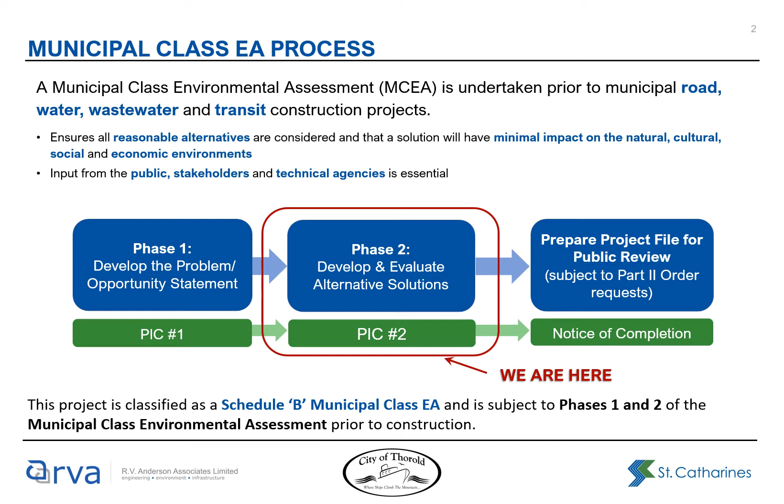Problem Opportunity Statement and Study Area. As shown on the attached plan, the study area consists of St. David's Road from Burleigh Hill Drive, Collier Road to Townline Road, and Townline Road from St. David's Street West to East Limit. This environmental assessment study was initiated to review opportunities to address several issues within the study area.

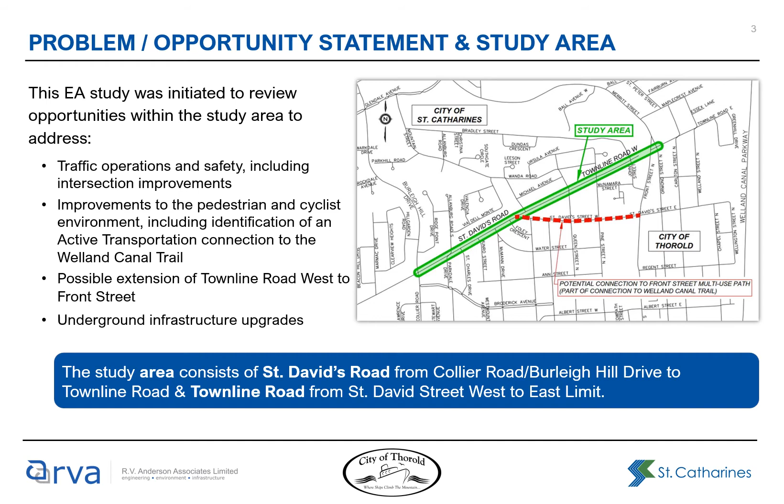The problem opportunity statement includes the need to address traffic operations and safety, including intersection improvements, improvements to the pedestrian and cyclist environment, including identification of an active transportation connection to the Welland Canal Trail, possible extension of Townline Road West to Front Street, and underground infrastructure upgrades.

Evaluation of alternative solutions. In Phase 2 of the Class EA process, alternative solutions to address the problem opportunity statement are developed. Each of the identified alternative solutions presented at the first PIC were comparatively evaluated based on criteria that represent the broad definition of the environment as described in the Environmental Assessment Act.

Evaluations are based on their impacts to technical environment: how the alternative addresses the technical requirements including safety, road condition, drainage, and utility needs; transportation performance: how the alternative addresses the transportation requirements including vehicular, pedestrian, and cyclist needs; socioeconomic environment: how the alternative impacts the local community, including compatibility with land use, impacts on local businesses and property requirements;

natural environment: how the alternative impacts the vegetation, water quality, fisheries, and wildlife habitat, as well as how the alternative addresses climate change; cultural heritage and archaeological environment: how the alternative will impact the cultural heritage and archaeological resources or First Nations communities; and costs: what are the capital, construction, maintenance, property, and other costs associated with the alternative?

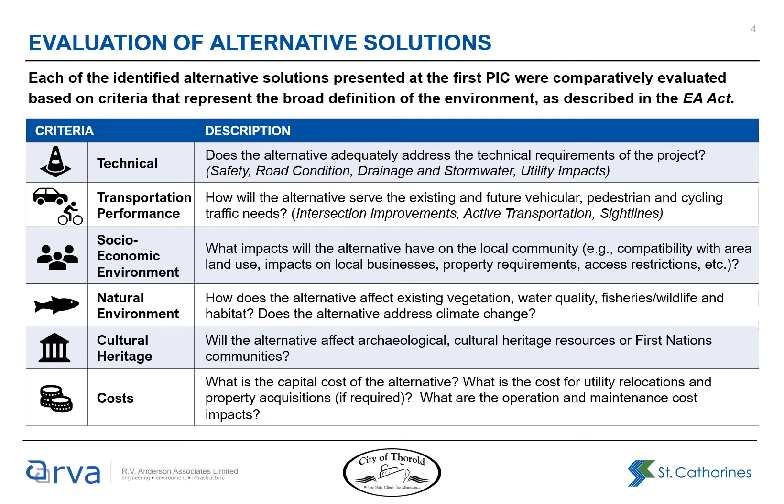Incorporating your comments. Alternative solutions were evaluated in consideration of all comments provided at Public Information Center PIC number 1 and via the online survey. Comments and questions provided at the first PIC included a strong preference for connecting Townline Road to Front Street with some concern regarding increased traffic on Townline Road, support for improvements to pedestrian and cycling amenities, including connections to Welland Canal Trail and Brock University, wide support for roadway reconstruction to address deteriorating pavement,

safety concerns with the current St. David's Road Townline Road intersection, including low visibility, pedestrian safety, and speeding vehicles. Roadway drainage improvements are needed with strong support for storm sewer upgrades. Sidewalks and cyclist pedestrian accommodation are desired on both sides of the road, provided there is no loss of property.

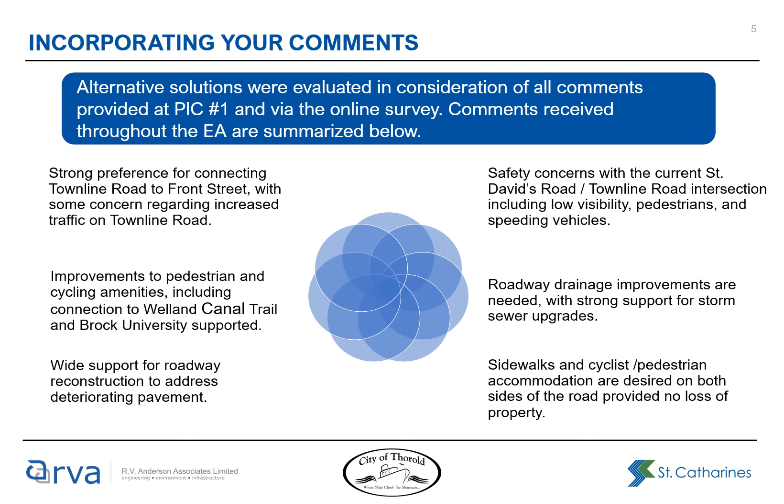Evaluation of alternative solutions, St. David's Townline Road intersection. Considered alternatives included: Alternative 1, do nothing. Alternative 2, realign St. David's Street West to create a standard four-way intersection with St. David's Road, Townline Road, and Leeson Street. Alternative 3, realign St. David's Street West to form a traditional T intersection with St. David's Road and Townline Road.

Alternative 4, realign Townline Road to create a T intersection with St. David's Road and St. David's Street West. And Alternative 5, realign Townline Road and St. David's Street West to create a roundabout configuration. Through the evaluation presented, Alternative 2, realign St. David's Street West to create a standard four-way intersection, is the recommended solution to be carried forward.

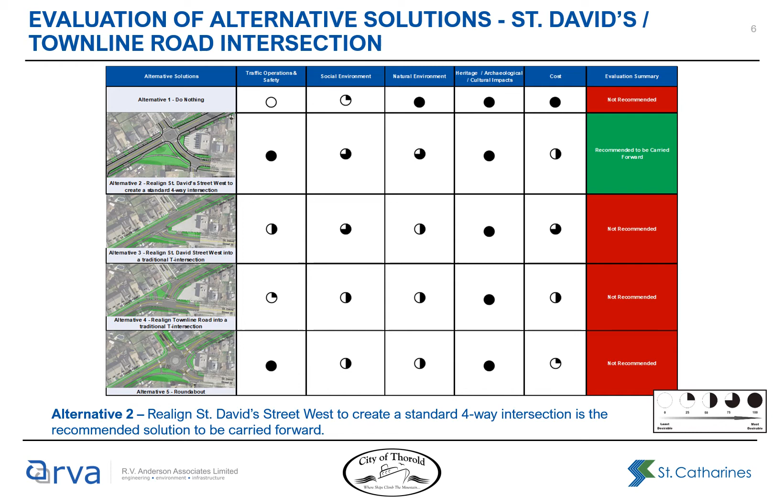Recommendation: St. David's Road Townline Road intersection. The recommended solution, Alternative 2, realign St. David's Street West to create a standard four-way intersection, will include the following key components: realignment of St. David's Street West through Commercial Plaza to create a standard four-way intersection, removal of the existing stop sign for westbound vehicles, creating a free flow of traffic between Townline Road and St. David's Road. This alternative requires property from Avondale Plaza and driveway access modifications to 65 Whyte Avenue.

The figure below provides a conceptual rendering of the recommended intersection improvements. The key benefits of implementing this solution are: eliminating the shortcutting through the plaza between Leeson Street and Whyte Avenue, improving the safety of the intersection for vehicles, pedestrians, and cyclists, minimizing impacts to plaza parking, and enhancing public space by providing a parkette at the southwest corner of the intersection.

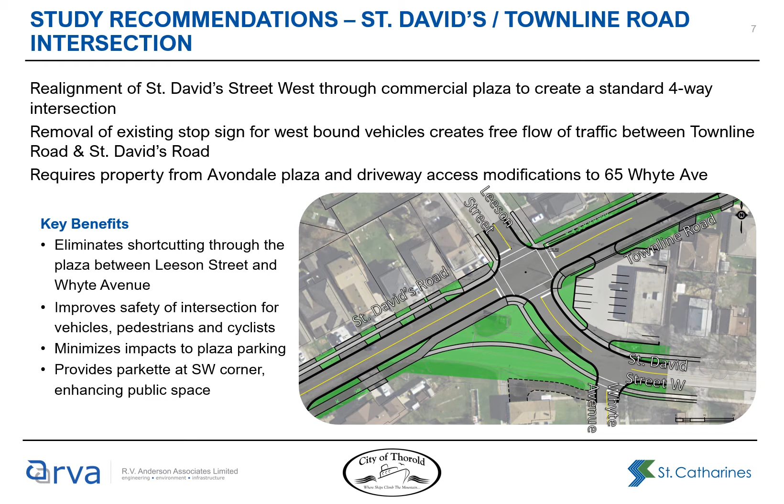Evaluation of alternative solutions, Townline Road extension. Considered alternatives included: Alternative 1, do nothing. Alternative 2, enhance trail connection only. And Alternative 3, extend Townline Road to Front Street. Through the evaluation of alternative solutions presented, Alternative 3, connect Townline Road to Front Street, Ormond Street North, is the recommended solution to be carried forward.

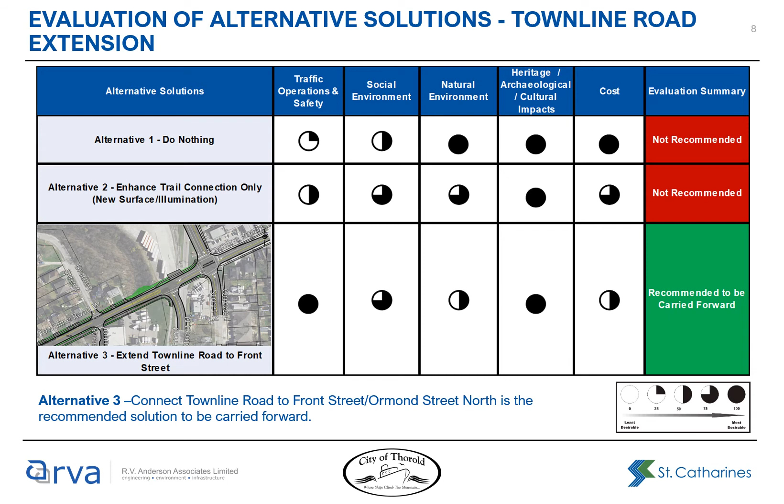Recommendations: Townline Road extension. The recommended solution, Alternative 3, connect Townline Road to Front Street, Ormond Street North, will include the following key components: extension of Townline Road East to connect with Front Street with a new multi-use path connection to Front Street, realignment and termination of Front Street at Townline Road, eliminating current one-way section of Front Street north of Townline Road, and relocation of the anchor gateway feature to southwest corner of the new signalized intersection, improving sightlines and aesthetics at the gateway to downtown Thorold.

The figure below provides a conceptual rendering of the recommended improvements. The key benefits of implementing this solution are: reduce truck traffic on Townline Road by providing an alternate route for commercial trucks, and improvements to emergency access and response times, network connectivity for all road users, intersection safety and operations through improved sightlines, geometry, signalization of intersection, and safety for pedestrians and cyclists through the introduction of sidewalk, multi-use path, and pedestrian crossings.

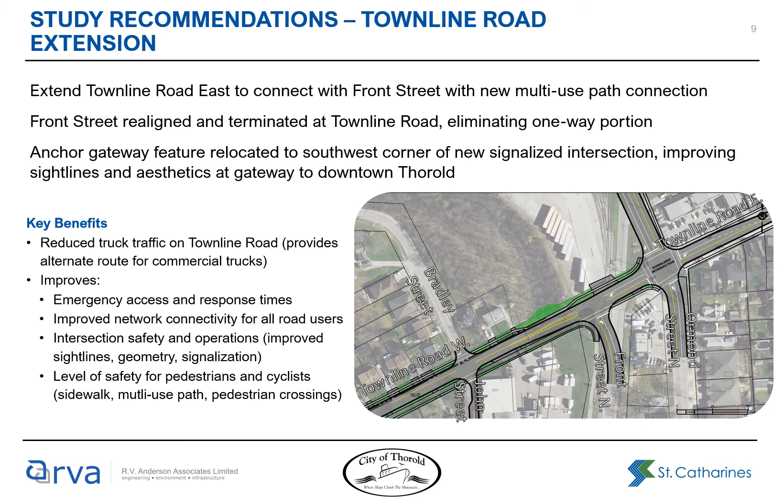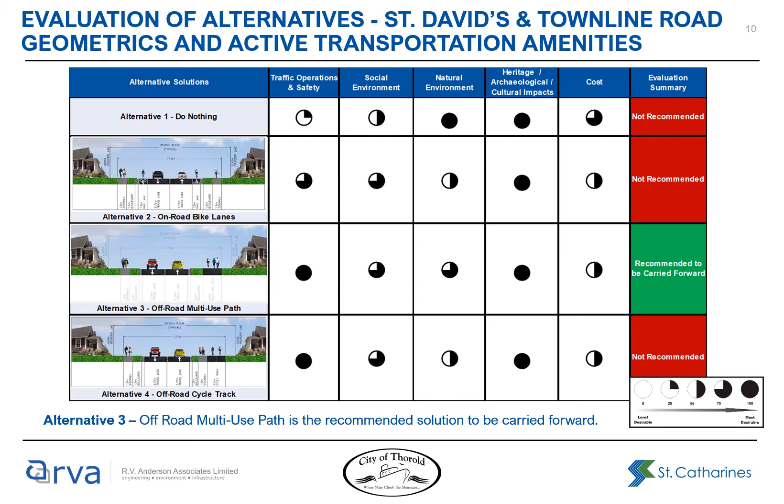Recommendations: St. David's and Townline Road geometrics and active transportation amenities. The recommended solution, Alternative 3, off-road multi-use path, includes the following key components. Separated 3-meter multi-use path along the south side with connections to future multi-use path west of Burleigh Hill Drive, Niagara Region. 1.5-meter sidewalk on north side of road. On-road parking spaces provided along south side of Townline Road. Roadside ditches to be replaced with urban curb and gutter, and minor encroachment towards properties at East End with no property impacts. The figures below provide a conceptual rendering of the recommended cross-sections for each road.

The key benefits of implementing this solution are respecting the current property line with no property required, separation between cyclists, pedestrians, and vehicles, connects with existing and proposed multi-use paths adjacent to the study area, and improved drainage via curb and gutter.

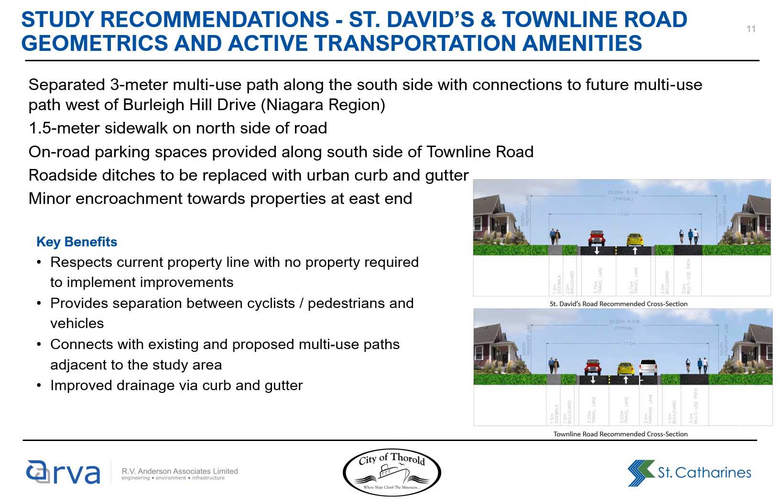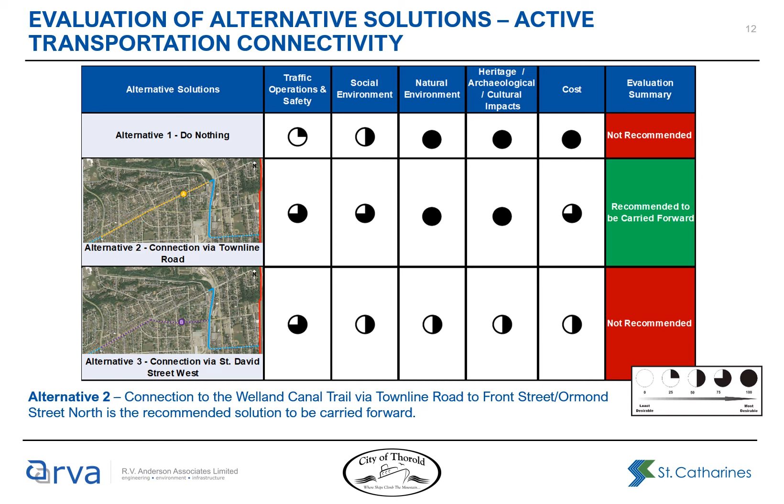Evaluation of alternative solutions, active transportation connectivity. Considered alternatives included Alternative 1, do nothing, Alternative 2, connection to the Welland Canal Trail via Townline Road to Front Street, Ormond Street North, and Alternative 3, connection to the Welland Canal Trail via St. David Street West to Front Street. Through the evaluation of the alternative solutions presented, Alternative 2, connection to the Welland Canal Trail via Townline Road to Front Street, Ormond Street North, is the recommended solution to be carried forward.

Recommendations, active transportation connectivity. The recommended solution, Alternative 2, connection to the Welland Canal Trail via Townline Road to Front Street, Ormond Street North, will include the following key components. The installation of a multi-use path along the south side of Townline Road to Front Street, Ormond Street North, connecting to the existing multi-use path on Front Street. This new connection will provide a continuous route into downtown Thorold where pedestrians and cyclists can access the Welland Canal Parkway Trail via future multi-use trail on Regent Street.

The figure below provides a conceptual rendering of the recommended cross-sections for each road. The key benefits of implementing this solution are no additional impacts to property or from construction along St. David Street West, reduced construction costs, provides connectivity to Merritt Trail, and provides continuous connectivity from Welland Canal to Brock University and downtown Thorold.

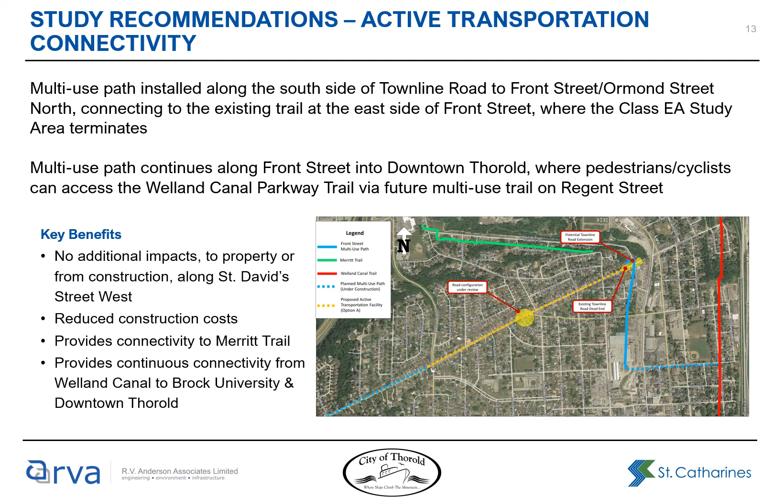Study recommendations, drainage and municipal service upgrades. To improve drainage and stormwater management and upgrade municipal services, suggestions include upgrade or replacement of the existing storm sewer and installation of new storm sewer at the east end of Townline Road. No existing storm sewer in this location. New storm sewer is recommended to outlet within the existing culvert of the old Welland Canal, minimizing impacts to the watercourse and vegetation. Roadside ditches to be replaced with curb, gutter, and catch basins draining to the storm sewer, and minor water main replacement in some areas.

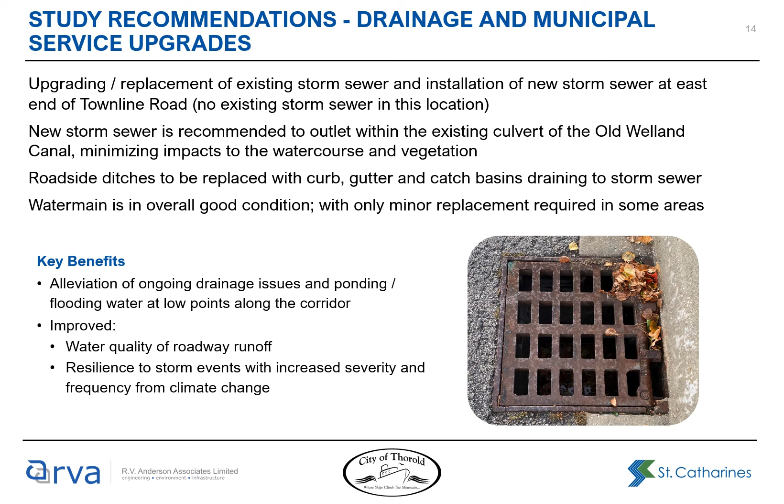Key benefits of these recommendations are alleviation of ongoing drainage issues, ponding and flooding water at low points along the corridor, improved water quality of roadway runoff, and increased resilience to storm events with increased severity and frequency from climate change.

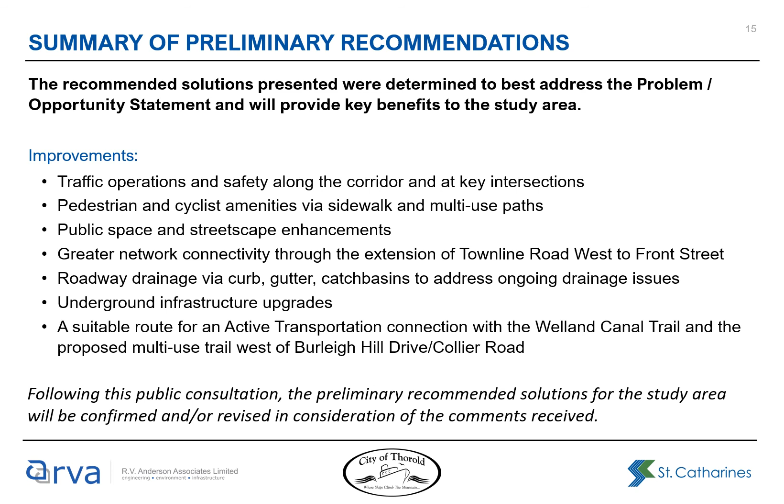Summary of preliminary recommendations. The recommended solutions presented were determined to best address the problem opportunity statement and will provide key benefits to the study area. Key improvements associated with these recommendations include traffic operations and safety along the corridor and at key intersections, pedestrian and cyclist amenities via sidewalk and multi-use paths, public space and streetscape enhancements, greater network connectivity through the extension of Townline Road West to Front Street, roadway drainage via curb, gutter, and catch basins to address ongoing drainage issues, underground infrastructure upgrades, and a suitable route for an active transportation connection with the Welland Canal Trail and the proposed multi-use trail west of Burleigh Hill Drive, Collier Road.

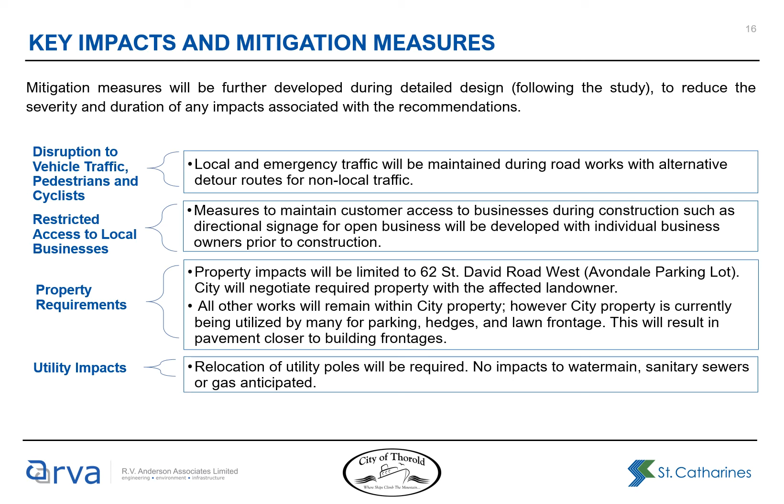Property impacts will be limited to 62 St. David Road West, Avondale parking lot. The city will negotiate requirements with the affected landowner. City property is currently being utilized by many for parking, hedges, and lawn frontage. This will result in pavement closer to building frontages. Relocation of utility poles will be required to implement the study recommendations. No impacts to underground infrastructure, including water main, sanitary sewers, or gas, are anticipated.

What are the next steps? Following this online public information center, next steps to be completed by the project team will include reviewing and addressing the comments submitted following this PIC, confirming or, if necessary, modifying the recommended solutions presented, preparing and submitting the project file report for 30-day public review, and finally, proceeding to detailed design and construction, which is tentatively planned for 2021 pending council approval and budget availability.

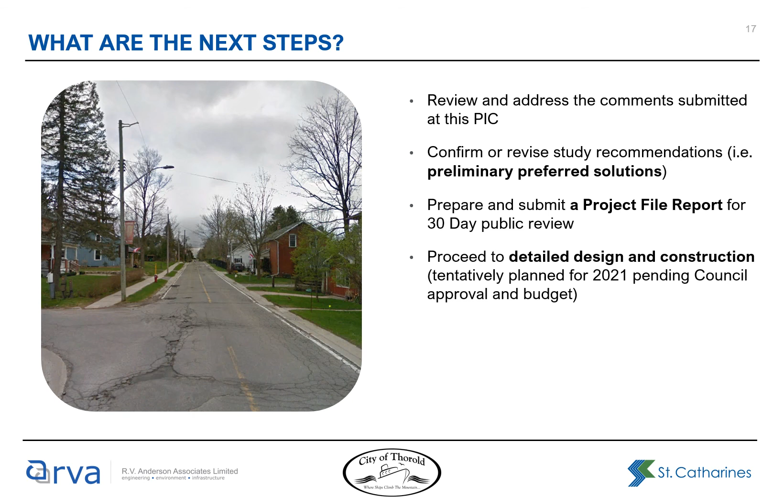Your input is important. On behalf of the entire project team, thank you for your interest in the Municipal Class Environmental Assessment for St. David's Road and Townline Road. Let us know your concerns by completing the online comment form provided. Alternatively, please contact us or email your comments to the project team by November 14th, 2020.

Project team contacts: City of Thorold, Abu Rashad, Project Manager, Engineering Division, telephone 905-227-3535, email

thoreng@thorold.com, or RV Anderson Associates Limited, Andrew McGregor, Senior Planner, EA and Approvals, telephone 905-685-5049, email amcgregor@rvanderson.com.